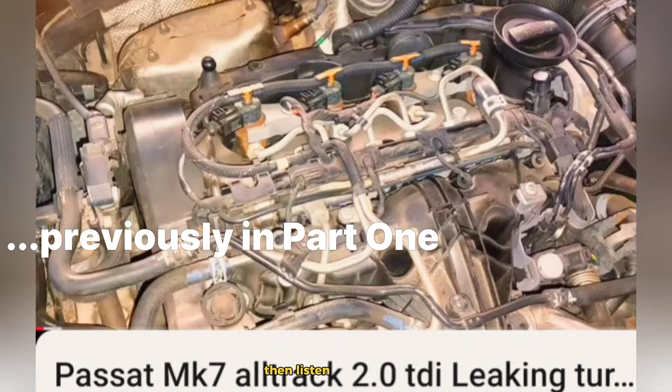In the previous video I was listening to the music, then listening to the engine, then looking at something, and then I decided to remove the turbocharger. And go up.

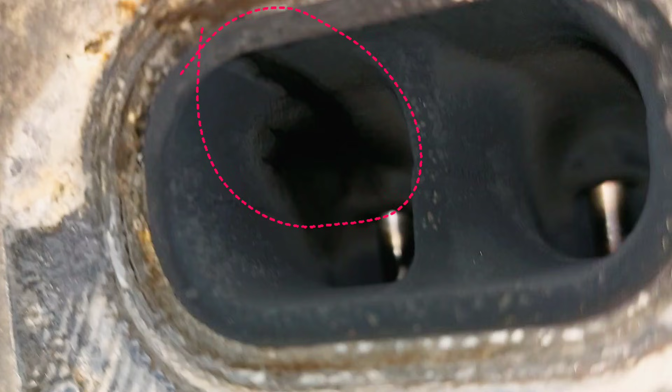So in this part I will be looking at something inside of the exhaust channels of the cylinder head. And you can see that in cylinder 4 there is some trace of leaking. Maybe it's oil, maybe it's coolant, I don't know for now. And cylinder 3 seems to be okay without any leaking. Looks dry. Cylinder 2 also has this kind of leakage, and cylinder 1. And it looks like I need to do some small disassembling of some stuff on this engine.

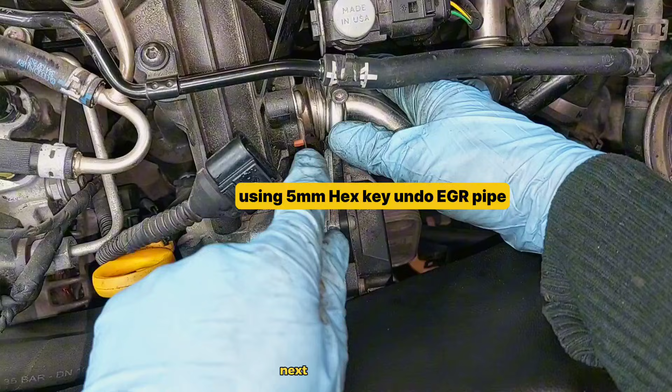To take off this manifold you will need to take off this hose using a 7mm socket. Disconnect this connector from the throttle, using a 10mm wrench. Next, undo this pipe of the EGR system, it's a 5mm hex key.

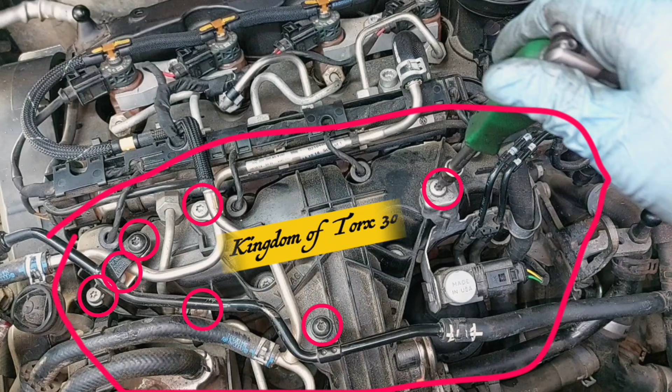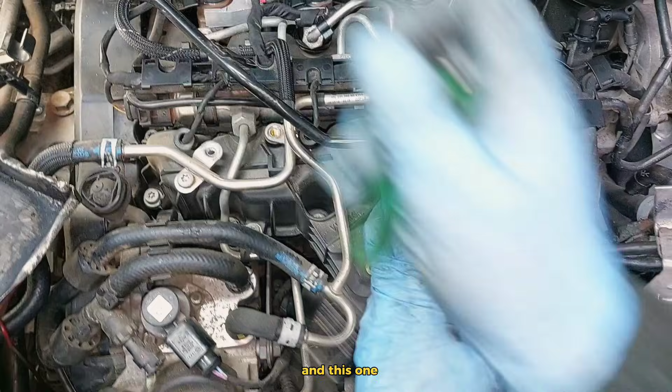Next, this pipe of coolant. Every one of these is T30. Every bolt. This bolt and this bolt. And this one. Over there. 17mm wrench. You need to undo this high pressure pipe. Then you can press from both sides this retaining clip to remove the electrical harness.

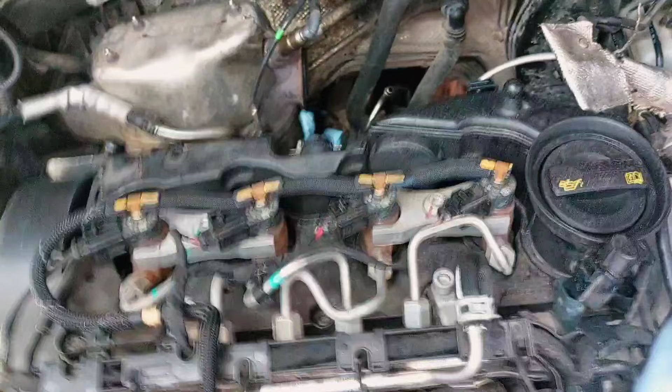Next, undo these high pressure pipes to the injectors, 17mm wrench. Disconnect this sensor. This one. And then a multi-square bit to the high pressure rail. Now using a screwdriver you can remove this. Oh yeah.

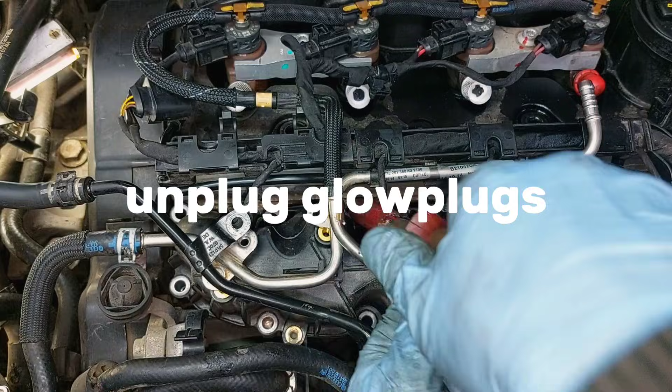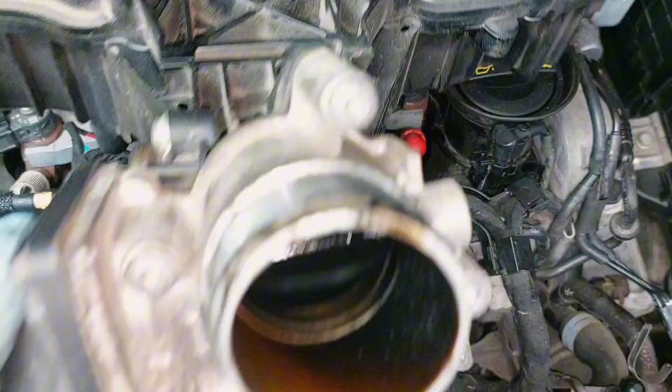Now all of these bolts, 1 2 3 4 5 6 7 8 9 and 10. Next, using some pliers like this. Wow, really tight. The throttle looks like this. T30 if you need to remove it. Here you go.

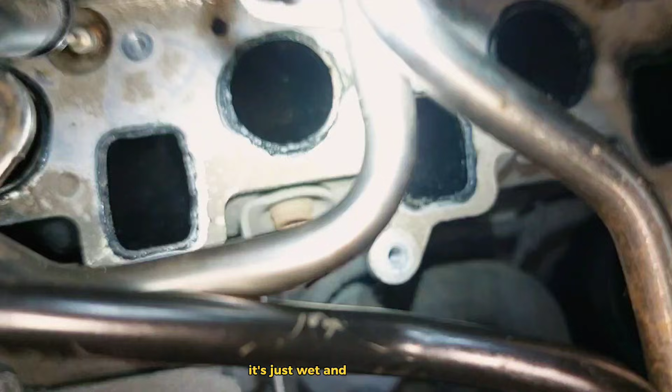Now let's take a look into the intake channels, and cylinder 4 is a little bit washed, and every other channel is just wet and dirty from oil and maybe coolant a little bit.

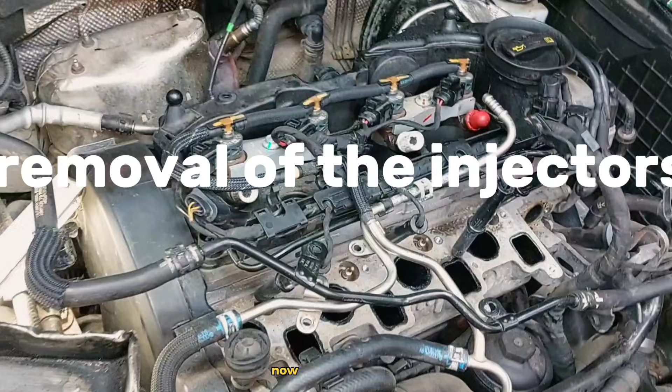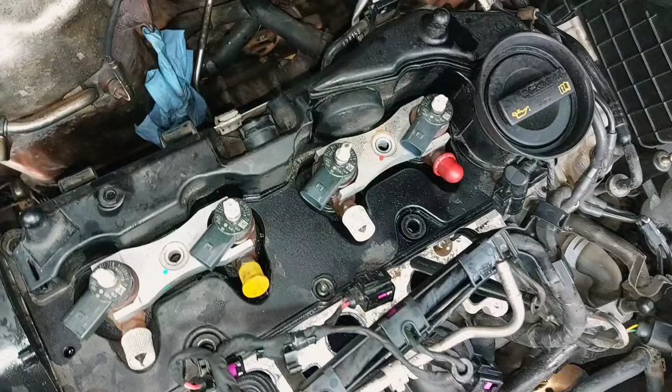Now injectors removal, and you need to unplug connectors and then remove the return line. To do so, press from both sides and pull up this retainer. M8. You also need to remove this vacuum pipe. Remove the mounting bracket like this.

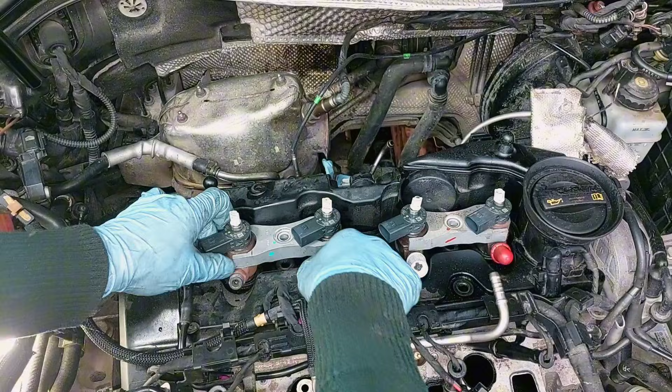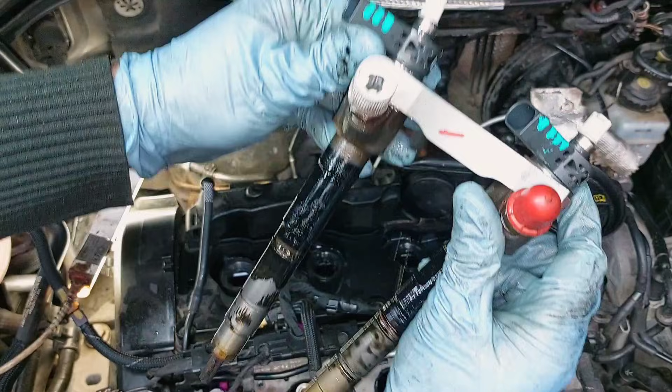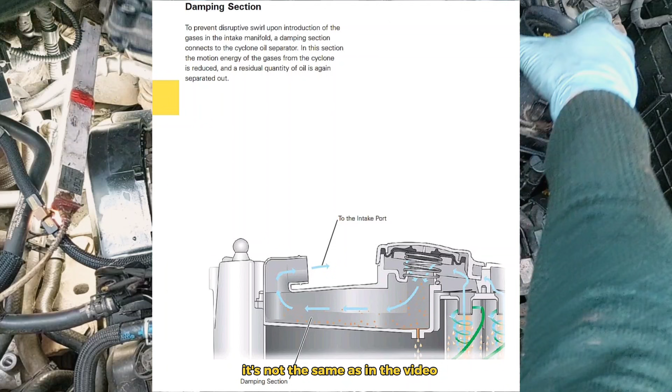And now you're able to remove the valve cover. And some pictures with the crankcase gases ventilation inside of this valve cover. It's not the same as in the video, but the principle is the same. Oh. Oops. So, one bolt goes.

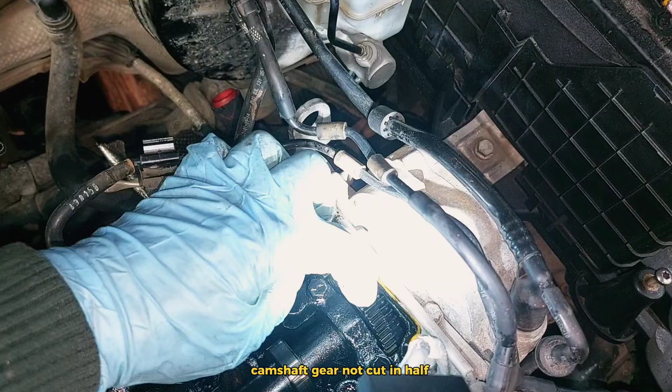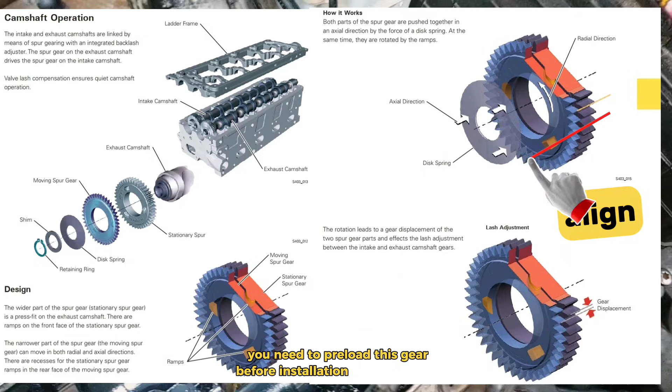Wow, everything looks so fresh and lubricated with crude oil, probably. Simple gear, simple drive gear, camshaft gear. Not cut in half. Very simple. And if you have this kind of gear on the exhaust camshaft with an anti-backlash system, then remember that you need to align the two pieces of this gear with each other. Line up the split timing gear teeth. Or simply saying, you need to preload this gear before installation of the camshaft.

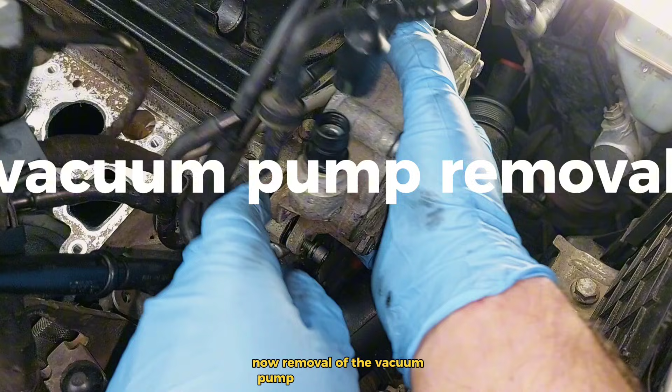Now glow plugs. Now removal of the vacuum pump. Remove this vacuum line. T30 socket. 1, 2, 3, 4 bolts.

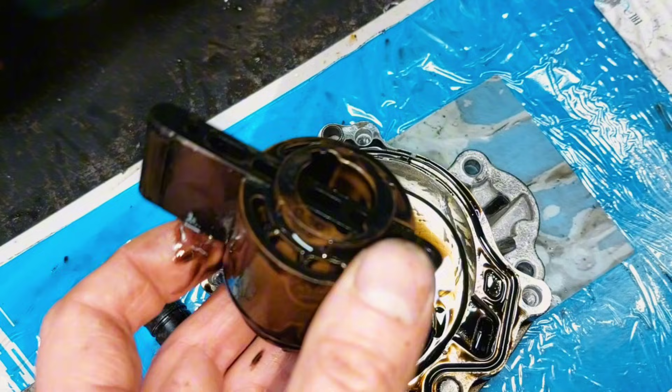Danger! The vacuum pump may under no circumstances be dismantled, as the vacuum part could otherwise malfunction. This would result in the failure of the brake booster. And don't worry, it's a faulty vacuum pump from another 2.0 TDI engine. So basically it has a very simple construction. This rotor and vane are rotating from the camshaft movement and somehow create vacuum.

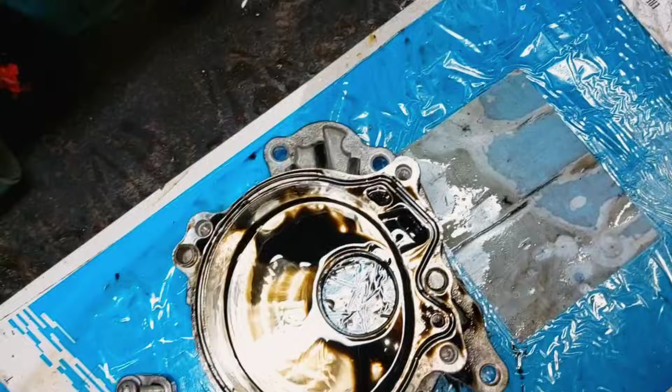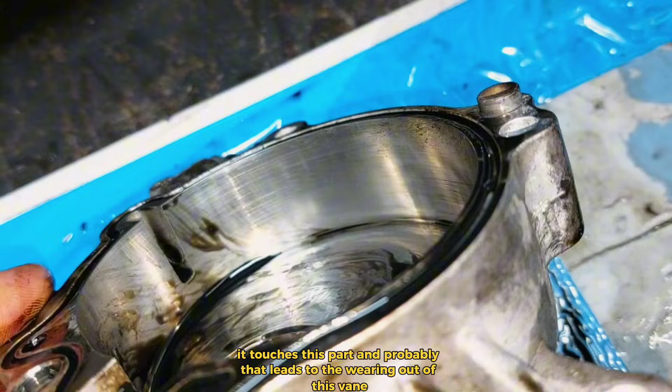So the main reason that we had to replace this vacuum pump back in the days was a muffled knocking sound coming out from it, and probably that noise was caused by this part over here. When the vane rotates, it touches this part, and that probably leads to the wearing out of this vane, which is basically plastic. This picture is only for example, and it's not the same vacuum pump that is in this video. So if you have some kind of muffled knocking sound coming from the vacuum pump, maybe this is why.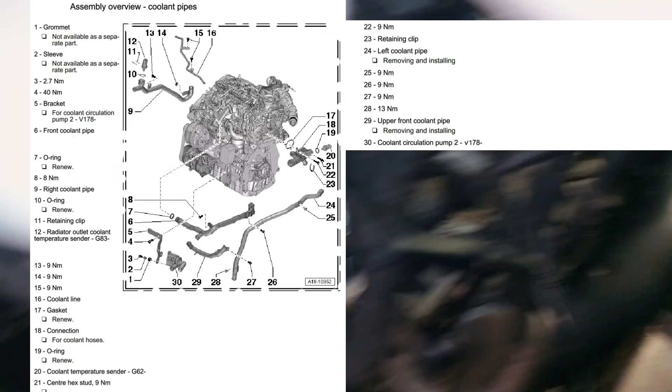Remove this connector. Next, I need to remove this pipe. And also this bolt holds this pipe and this one. There's two of them.

First you need to disconnect this pipe system. And only then you have access to these two bolts, the mounting brackets that hold this metal pipe. Just move it somewhere aside. Then you can take off this mounting bracket.

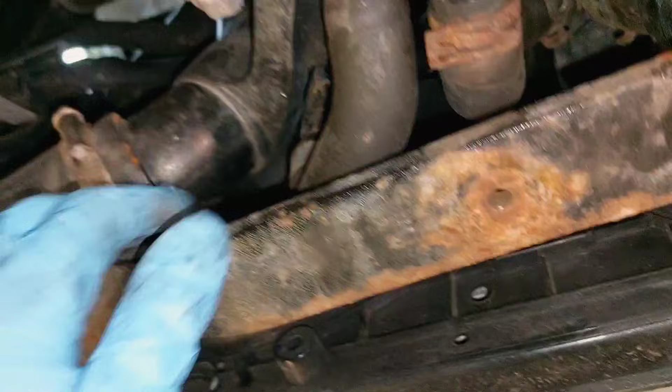Next, this one. And this one nut also, this bracket. Disconnect this vacuum pipe. Also disconnect the oil pressure switch on the way. You need to drain some coolant. You can remove this hose to do so and drain.

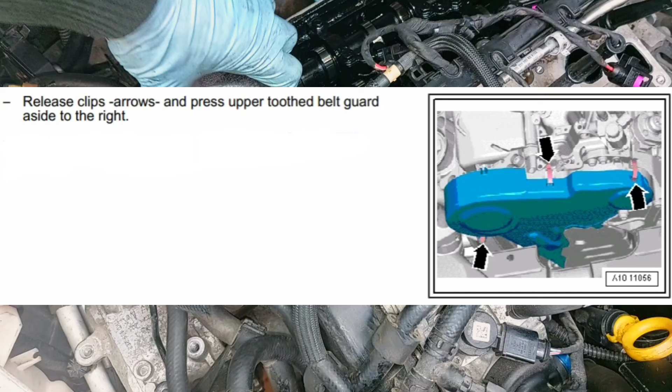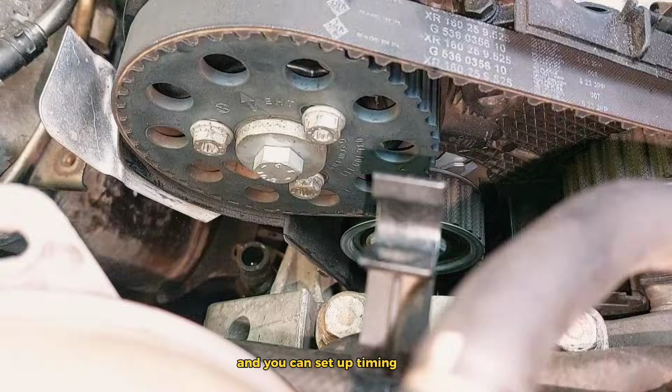Now this belt cover. Going off. Now I need to move the belt. And you can set up timing marks now, or maybe later after all the work that you need to do with the cylinder head. One here, one over here. Also you can remove this sprocket.

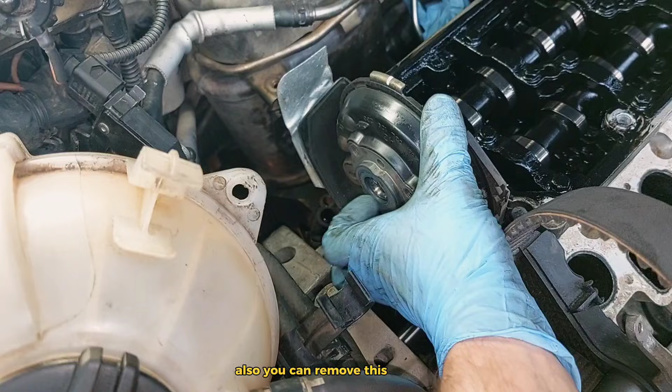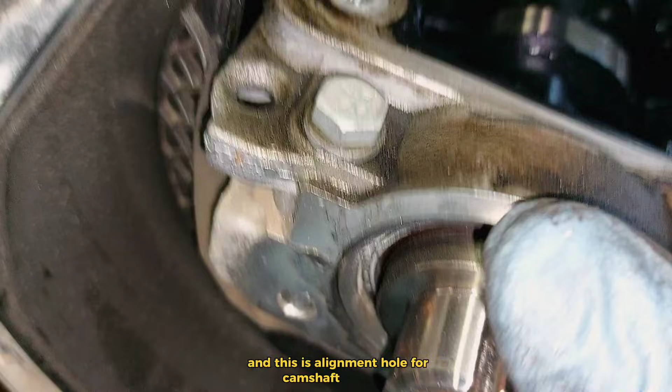It's an 18mm socket to undo the bolt with the camshaft sprocket, and it looks like this. The camshaft oil seal is PTFE. Don't use oil when replacing because it will leak. And this is the alignment hole for the camshaft sprocket. You will need a 6mm drill bit, something like that, for aligning this sprocket.

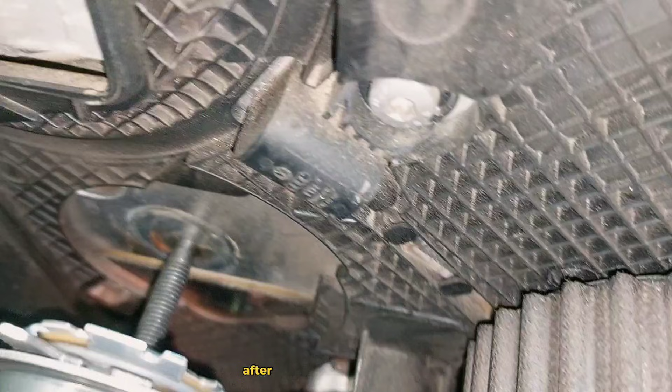After removal of the timing belt, undo the camshaft sensor and use some thread locker when you are installing. To move on faster with removal of the cylinder head, I will leave this mounting bracket in place for now, and also this tensioner will stay. But to install everything back correctly, you will need to remove this mounting bracket and also maybe the coolant pipe that is in front of the engine.

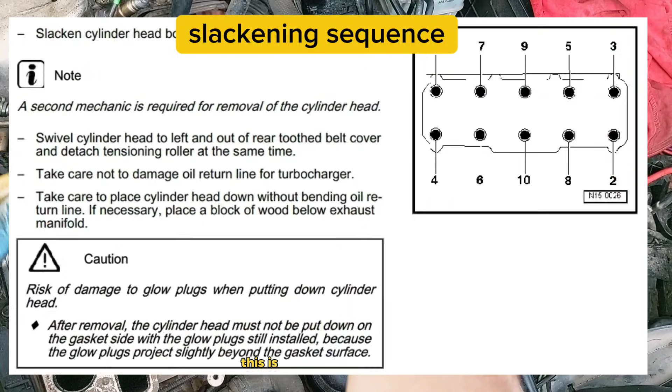Using an M12 multi-square bit, undo the cylinder head bolts. There's no need to remove the camshaft retaining frame to remove the cylinder head; you can leave it in place if you don't need to remove it. This is the sequence of slackening the cylinder head bolts. Washers. Oops, connector of the oil switch. Okay, I will unplug it.

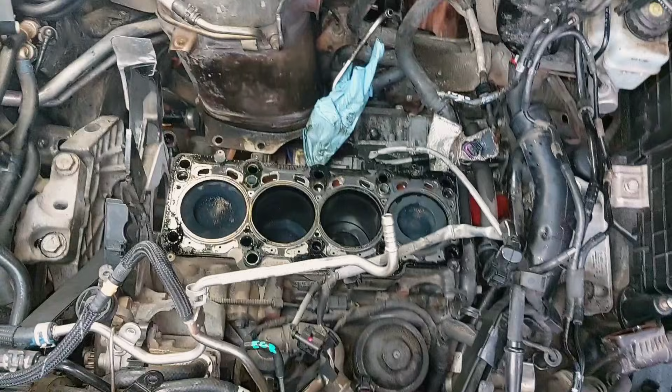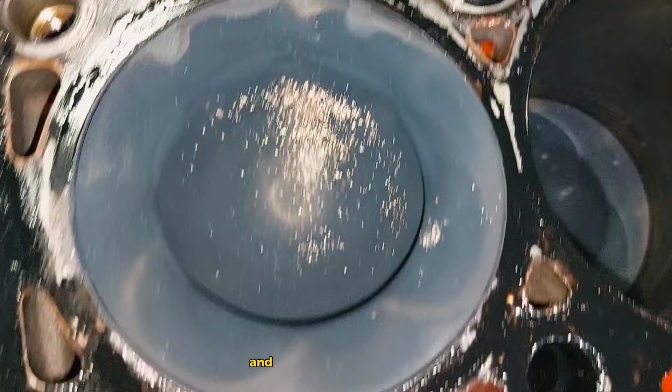And now the cylinder head gasket, and this is how you can identify the cylinder head gasket. And now a closer look at the cylinder block, and it's not looking very overheated, I would say. No signs of big damage inside the cylinders, and on the pistons everything also looks fine.

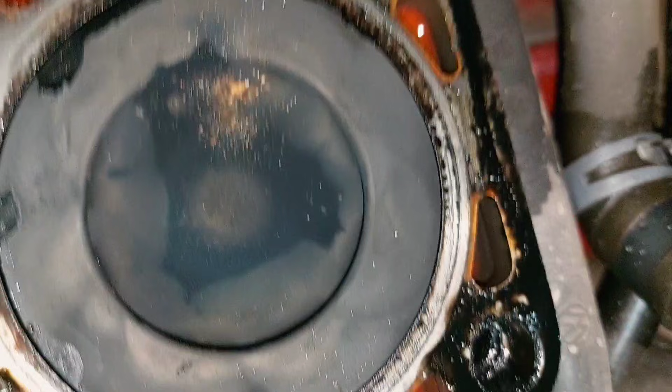Now I will undo the camshaft frame in this sequence. Sometimes you need to hit this frame to be able to remove it, because the sealant may glue very well to the surface. In this place there is a guide for the camshaft retaining frame. And from the other side, closer to the oil seal, there is another guide for the camshaft carrier.

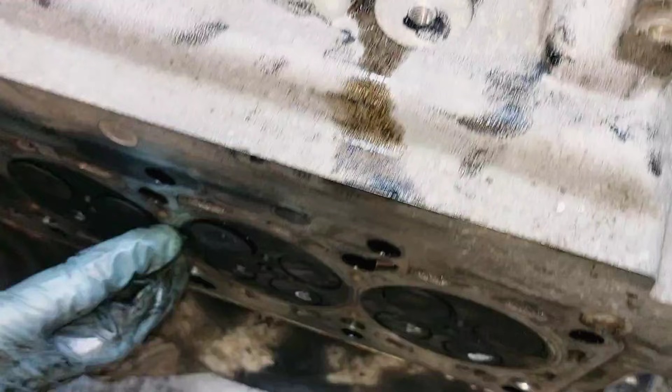And you can mark the position of the camshaft gears against each other. It will be easier to install them back. To remove the valves, you need to press on the spring, then remove the keepers, retainer and spring. Also, it's better to number all the valves, and this is how you can measure the clearance between the valve stem and guide.

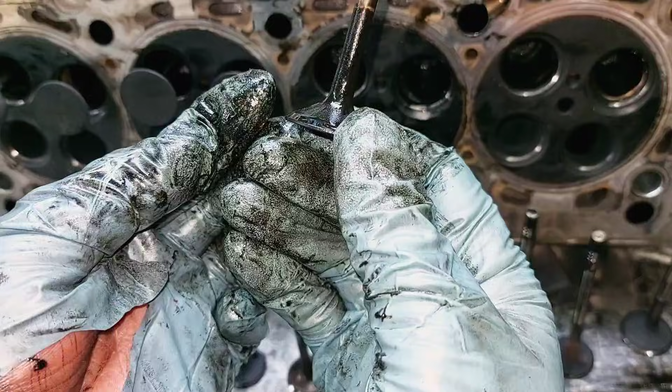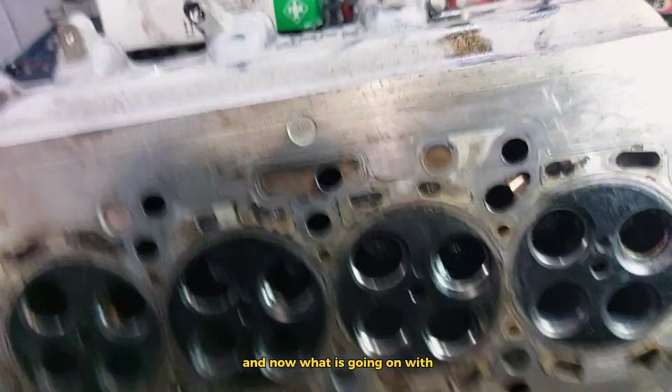And now, what is going on with this cylinder head? Well, the main problem is some small cracks between the valve seats, and it's all because of overheating. The consequences of this overheating are more noticeable on cylinder 3, and on every other cylinder there are cracks in between the exhaust valves. Well, it looks like someone had a really good time with this Passat off-road. And so we have a crack along the entire length of the cylinder head. As you can see, cylinder 1 has a crack, cylinder 2, and cylinder 3 also, cylinder 4.

And the main cracks that affect coolant channels are inside of the cylinder head, and it's hard to show them. And now this is a new cylinder head. And in case you need to replace valve seals, it's the same procedure just like in this video. Valve seal. You can install valve seals this way or this way. Some oil inside.

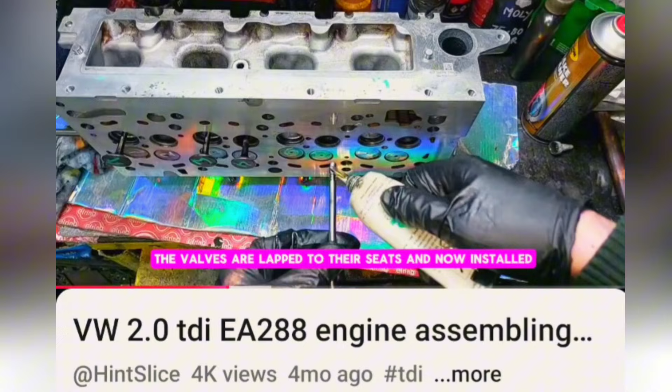And a 10mm socket, and you can push it all the way until it sits tight. Valves lapped to their seats and now installed. I didn't record how I lapped the valves, but basically it was like that. Lapping compound on our valve. Lapping, you just rotate it like this. As you do this, the sound changes.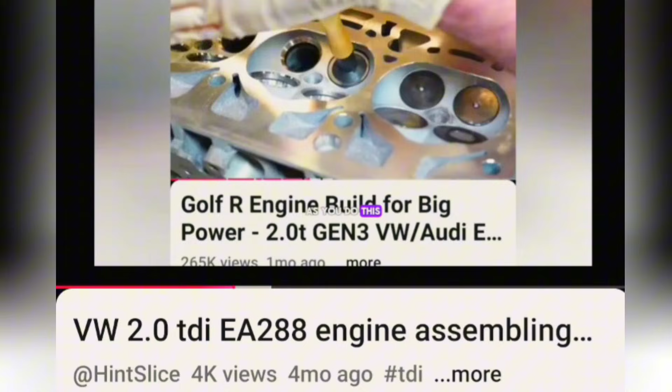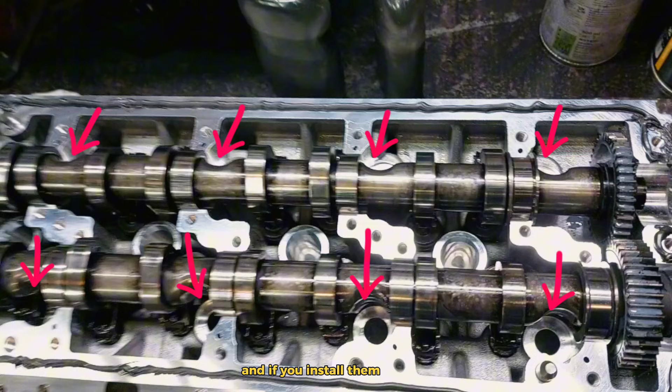Lubricate the valve stem before installation. Keepers back in place. Slightly smash the valves with the handle of the hammer so everything will sit tight. Camshafts are in their initial position, and if you install them correctly, you should be able to fit the bolts of the cylinder head easily, just like it's shown in this video. When the camshafts are well synchronized, the screws will go in without any problem.

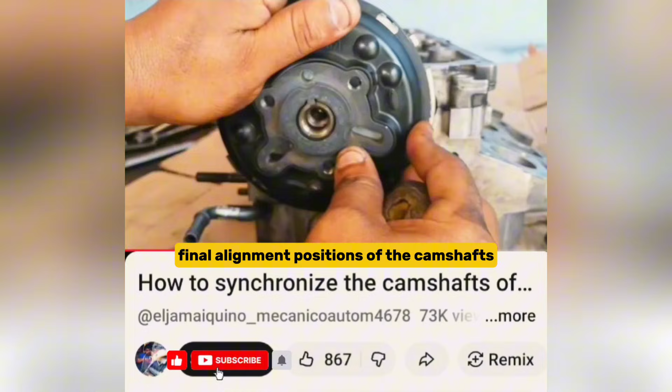Here. Because if a camshaft were to move, the screw wouldn't go in. And for the final position of the camshafts, if you don't have special tools, to make sure the exhaust camshaft is aligned properly, you can do as shown in this video. I want to show you that this guide for this gear must match up with this one that's on the head. So we're going to put it in place. It should go in smoothly. Friends, we have synchronized the gear and the camshaft.

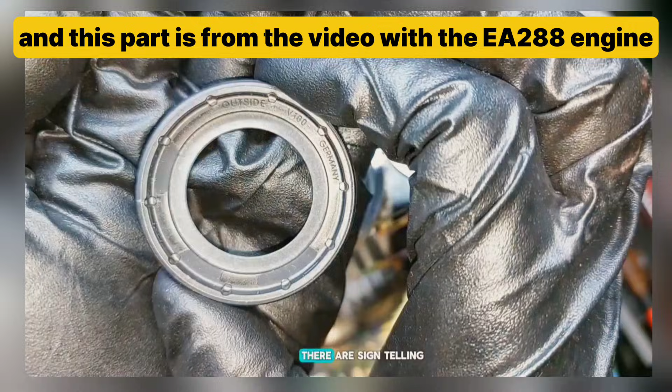And you can lubricate the gears before you put the valve cover on. One more time, this is a PTFE oil seal, so there's no need for lubrication when installing. And pay attention, this oil seal is, let's say, a little bit reversed, and the sealing lip is pointed outside compared to a normal oil seal lip. There are signs telling you which side goes outside. This side is outside. This way.

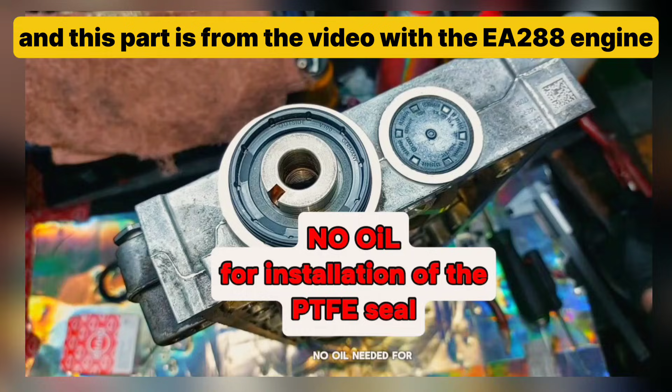No oil needed to install. Important: the PTFE oil seal must be installed dry. In order to guarantee that the PTFE oil seal will optimally perform its function, a minimum of 4 hours should pass after assembly and before the shaft is moved or rotated. I will apply sealant on the surface of the cylinder head, just like in the manual, but usually it's better to apply sealant on the surface of the camshaft retaining frame to be more precise.

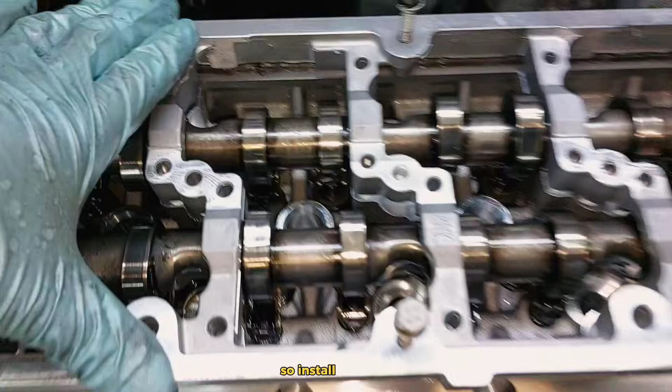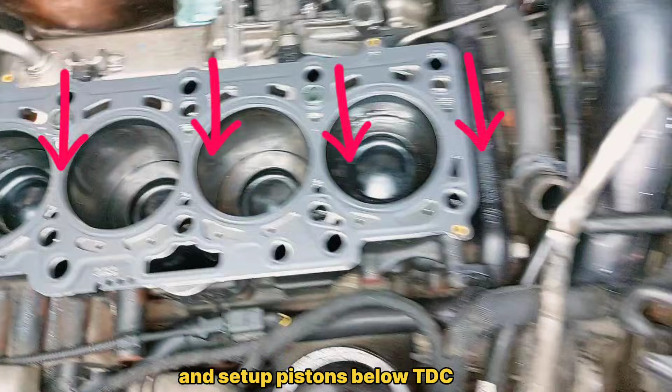So install this cover. Clean the surface of the engine block and lay down the gasket. Sometimes to choose the right thickness of the head gasket you need to do some measurements. And before you put the new gasket on, clean the holes for the cylinder head bolts. And set the pistons below TDC. New bolts.

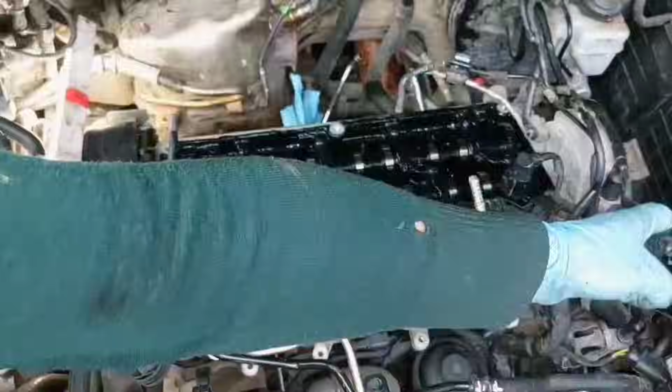Also apply fresh oil on the thread and under the head of the bolts. First you put the washers inside and only then the bolts. I'll be using the tightening sequence that came with the head gasket instructions. Try to rotate the torque wrench without stopping until it clicks, so you will get a more precise tightening torque. And install everything else if you need.

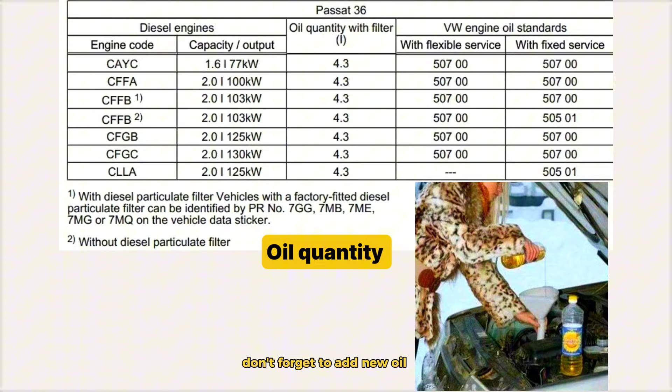And if you need to check inside the oil pan, maybe this video will help. And to install the timing belt, this video. At the end of the work, don't forget to add new oil and check the level on the dipstick. To bleed the cooling system, you can remove one of the hoses. I prefer the upper one of the heater. Then clamp this hose with pliers like this and wait until coolant flows from the pipe of the heater.